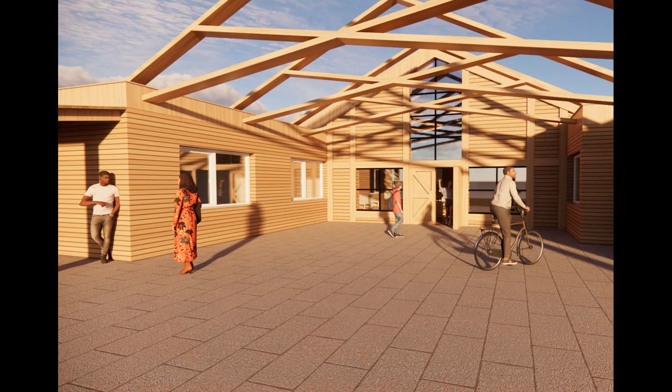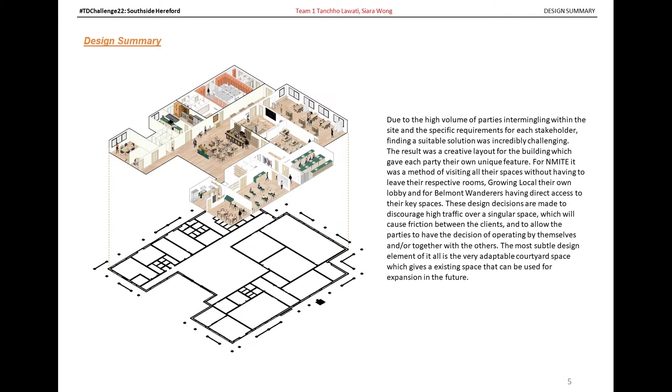So, to start us off, having 3 clients was a very new thing for all of us, hence the planning part of the design is what became the starting point of it all. Reviewing the brief and the rundown they gave us, we decided it would be best if the positions of the rooms were grouped up by the requesting client to help maintain the community's identity while still having the collision space be the main space to emphasize the community that will be built upon by the users, such as the safeguarding push by Growing Local for the 30 or so primary school children, the spatial plans developed into having the classroom and cooking school to be isolated.

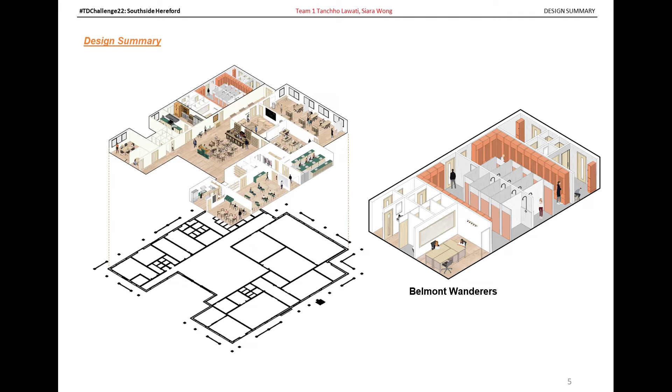This should ease the minds of the parents of the children, as well as give the staff members a sense of protection. For the Belmont Wanderers, we wanted the players to have ease of use for their spaces. To achieve this, we decided having direct access to the changing rooms, storage, and servicing kitchen would be what the users would desire from the zone the most. Luckily, this also helps with any muddy escapades, as they will not have to trek through the entire building to get to the space.

Finally, for NMITE, we wanted to utilize this more involved experience they wanted to create. So to mimic this, we decided to have the spaces be accessed from outside the zone and allow for circulation within the space, so to create a seamless learning environment.

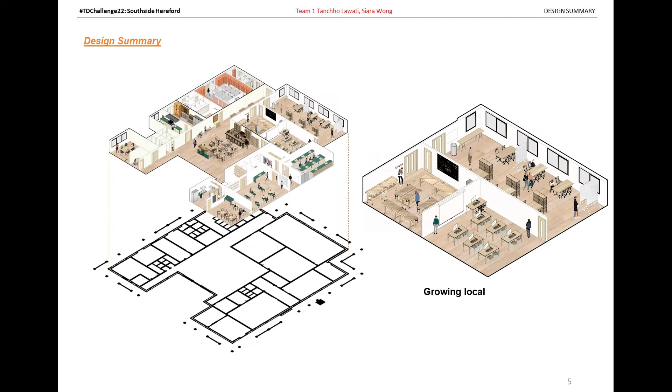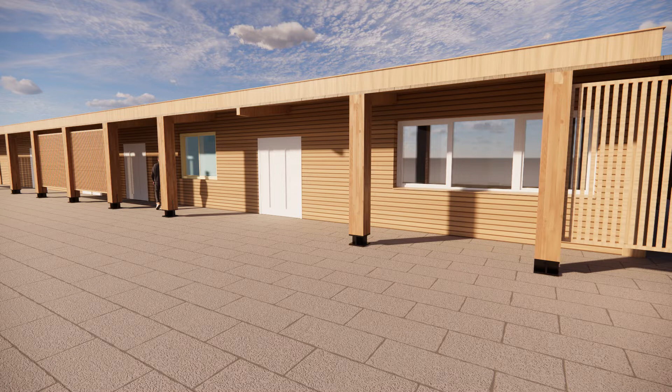Going into the externals of the hub, we have to keep in mind the budget we were working with, so simplicity was key. However, the narrative is not lost. Like in the plans, we wanted to emphasize the community building that would occur, hence the building is mostly a homogeneous design to give the impression of the 3 parties involved to be as one.

Then to give the hub the next step, we highlighted the collision space with a pitched roof, which came from the idea of creating a sort of barn due to the associated idea of community it has and the location of the hub. All of this is enhanced by the veranda with the wooden screens that goes around the building, helping it blend with the surrounding nature and the courtyard, generating a drawing effect, the trusses above to allow adaptability of the space, giving it a kind of awing atmosphere.

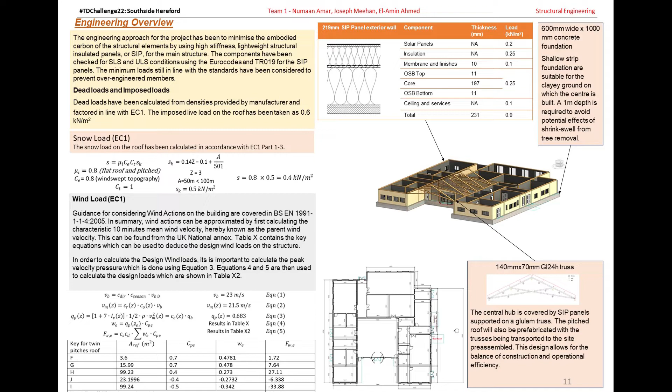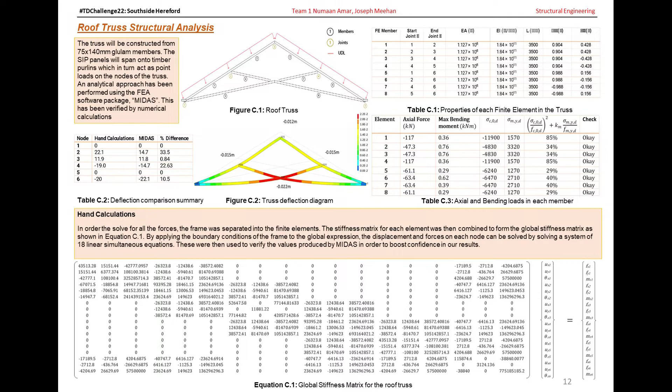The engineering approach for the project has been to minimise the embodied carbon of the structural elements by using high stiffness, lightweight structurally insulated panels, or SIPs, for the main structure. This is all done whilst keeping practicality in mind. The central hub is covered by SIP panels supported on a glulam truss. The pitch roof will be prefabricated, with the trusses being transported to the site pre-assembled. The truss was designed using FEA software and verified with hand calculations, thus balancing constructability with element efficiency.

The utilisation of SIPs allows the walls to be load-bearing, which reduces the number of columns needed to support the structure, hence reducing the total embodied carbon. The insulation also cuts down on the need for heating and cooling throughout the year, providing a pathway to cut down on the operational energy. The standard TR019 and Eurocode 5 have been employed in the SIP panel design.

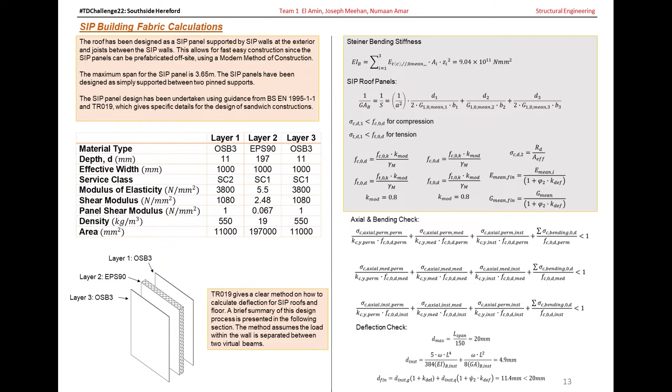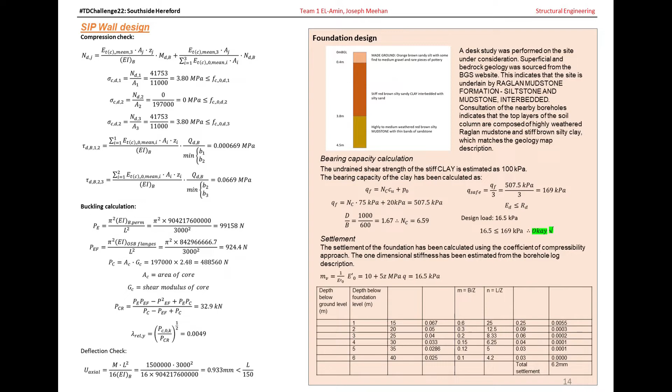For the walls and the roof, the same SIP panel is used, providing the opportunity for modern methods of construction, as this design allows for prefabrication with the cladding already applied. The SIP panels span between timber I-joists in the main area of the building. The timber I-joists also serve a secondary purpose of functioning as a servicing space.

The costing strategy has been to use locally sourced, durable, efficient materials to reduce costs and keep within the specified budget. The total cost is £1.4 million. The largest cost in the hub comes from the SIP wall panels, costing approximately £100,000. Only one profile of SIP was chosen throughout the design, since the limiting factor was the insulation, and therefore, although slightly over-designed from a structural point of view, there will be significant savings from standardisation.

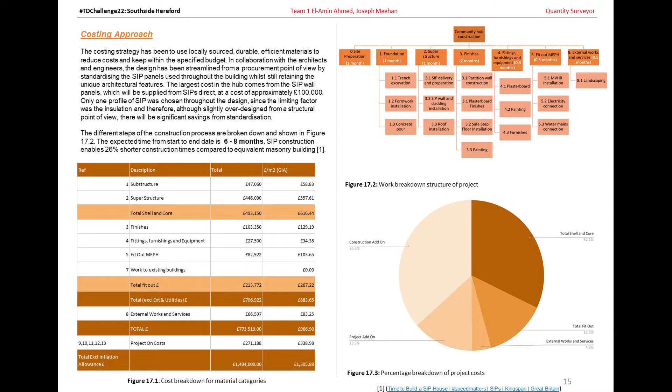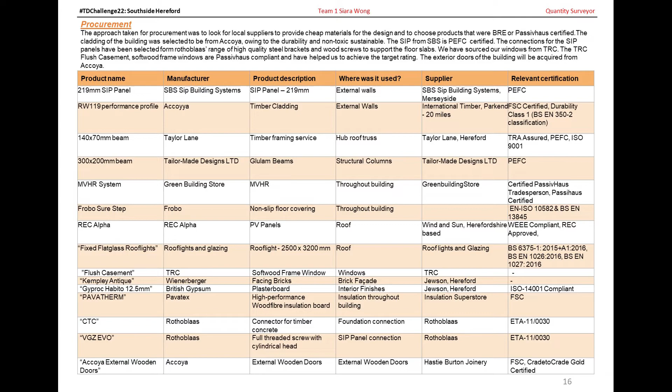The approach taken for the procurement was to look for local suppliers to provide cheap materials for the design and to choose products that were BRE or Passivhaus certified. The cladding of the building was selected to be from Accoya, owing to the durability and non-toxic sustainable material. The SIP from SBS is PEFC certified. The connections for the SIP panels have been selected from Rothoblaas's range of high-quality steel brackets and wood screws to support the floor slabs.

The landscape creates a biodiverse, climate-resilient hub that reconnects everyone with nature while also improving the biodiversity and promoting food production. The outdoor spaces improve people's interaction and engagement while also improving their mental health. Recreational and educational spaces are provided, like the proposed educational garden, natural play area, and the multi-use sports area.

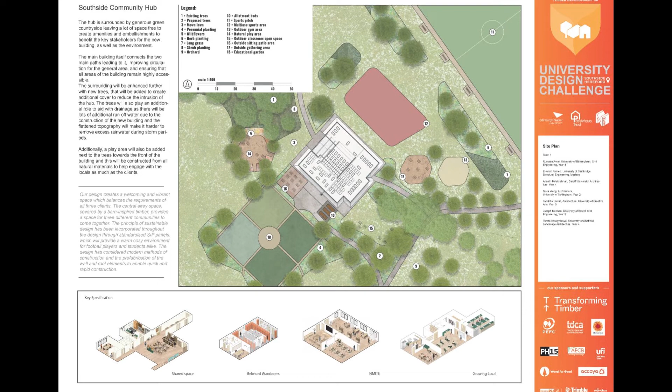The perennial planting and meadows of mixed colors and species support the rich biodiversity and attract different pollinators, birds, and insects, while it increases the opportunities for people to engage and interact with nature. They give structure and different sensory experiences to the site. People on site can feel the change of seasons with the changing colors of the plants.

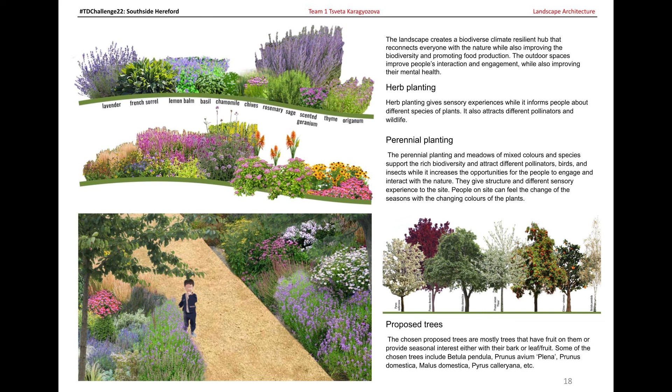Herb planting gives sensory experiences while also informing people about different species of plants. It also attracts different pollinators and wildlife. The chosen proposed trees are mostly trees that have fruit on them or provide seasonal interest either with their bark or leaf and fruit.